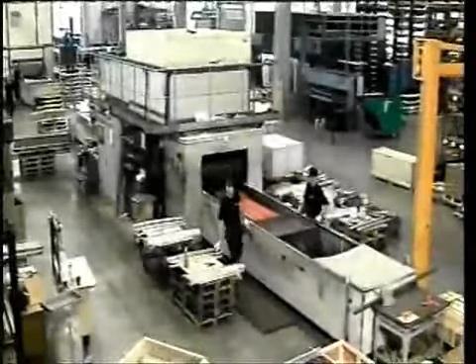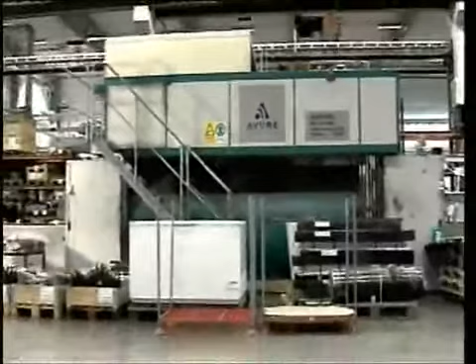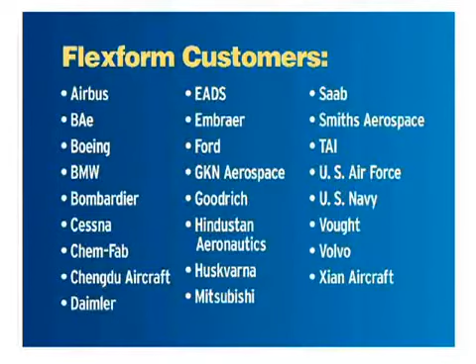Fluid cell pressing, or flex forming, is a low-cost sheet metal forming process designed for both prototyping and lower volume parts production. Avure Technologies is the world's leading supplier of these high-pressure presses, serving major manufacturers around the world. Recent advances in press and tooling design make this high-pressure forming technology more viable and affordable than ever for a growing number of metal fabricating companies.

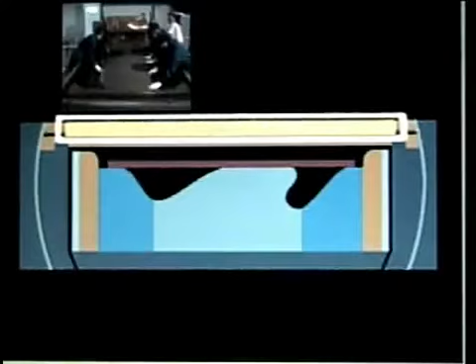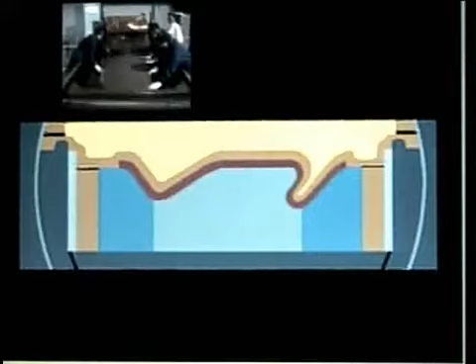Flex forming is a basically simple concept. A sheet metal blank is placed over a single shape-defining tool half. The upper tool half is a flexible rubber diaphragm which is pressurized by pumping in oil. As pressure increases, the diaphragm forms the blank uniformly around and into the tool. When the set pressure is reached, the oil is decompressed and pumped out of the press. The diaphragm returns to its rest position, formed parts are removed, and new blanks are loaded for another cycle.

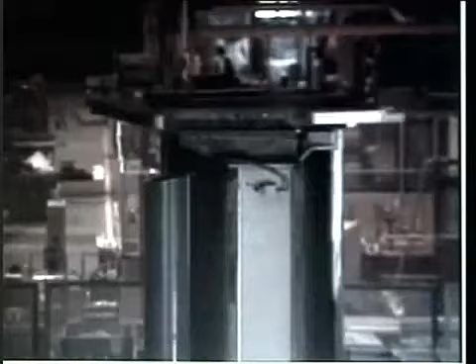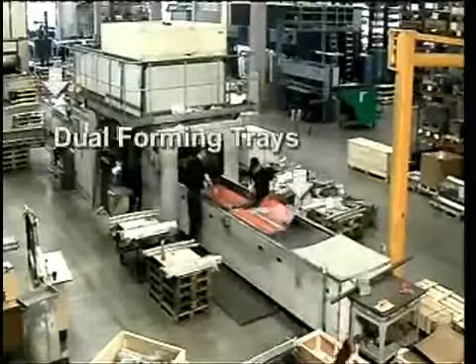Now let's take a closer look at the FlexForm press. The press frame is a horizontally positioned cylinder, reinforced with pre-stressed wire winding to safely contain the high hydrostatic pressure. The hydraulic system is typically housed above the press to conserve floor space. Tools and blanks are loaded into large forming trays on tables that shuttle in and out of the press. Parts are placed in the tray with no need for fine alignment or fixing in place.

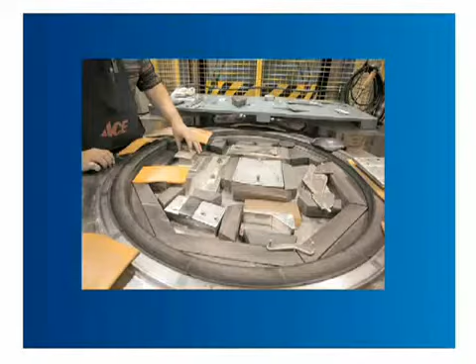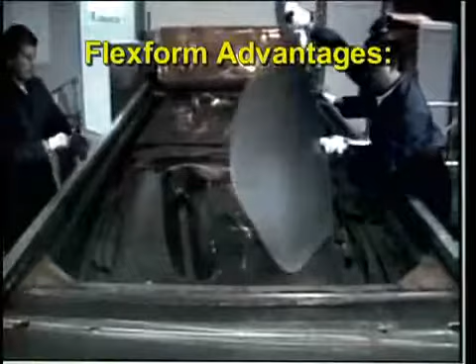Fluid cell forming has proven to have a number of economic and processing advantages, particularly when compared to rubber pad pressing and mechanical or hydraulic stamping. Unlike the 2- or 3-piece tool sets used in stamping presses, Flexform requires only a single shape-defining punch or die, cutting tool costs by 50 to 90%.

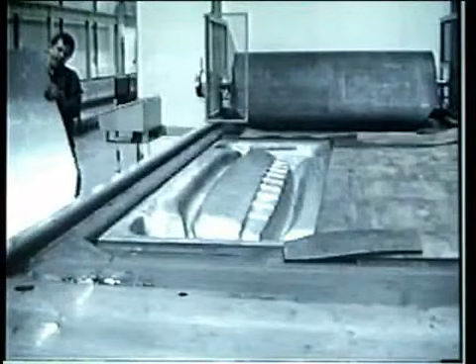Tool matching and alignment procedures are eliminated, and with the uniformly applied pressure, stresses in the tool are almost purely compressional, permitting the use of inexpensive, lower strength, easy-to-machine materials such as hardwood and plastic.

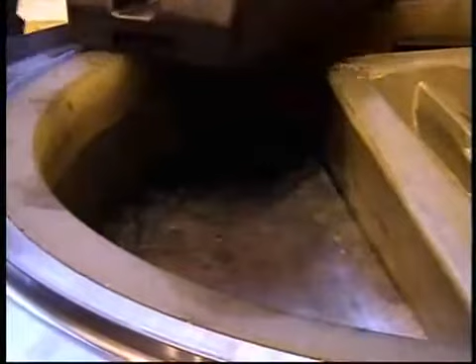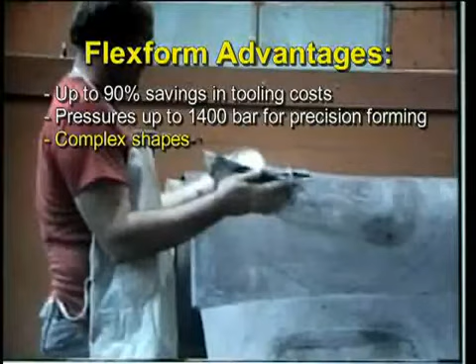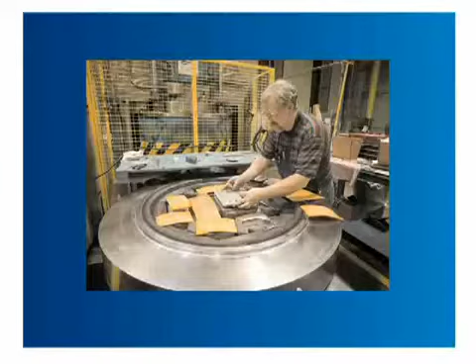Very high pressures up to 1400 bar or 20,000 psi form parts to precise tolerances with little or no manual correction. Intricate shapes, including undercuts and holes, can be produced, often in one operation. Tools can incorporate cutting edges to eliminate downstream trimming. Multiple parts can be processed in a single cycle.

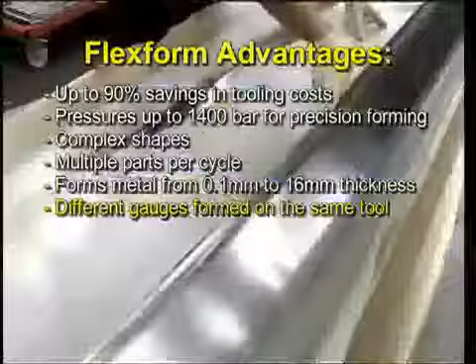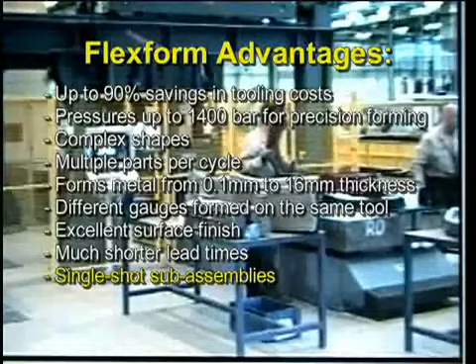Virtually any sheet metal from 1/10 of a millimeter to more than 16 millimeters, 0.004 to 0.63 inches, can be formed. Different gauges can be formed on the same tool. Surface finishes are free from scratches or gall marks. Lead times are dramatically shortened for both prototypes and production parts. Complex parts can be designed and produced that would be prohibitively expensive with conventional presses. Large, intricate parts can be formed, allowing designers to combine smaller components into single seamless units, saving downstream assembly time and the extra weight of welds and fasteners.

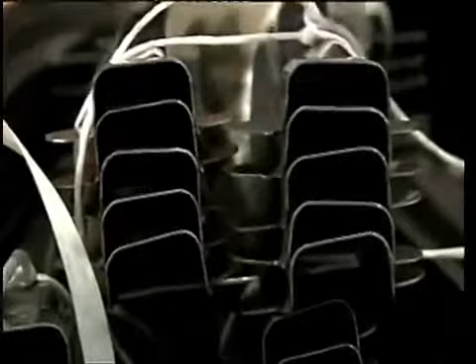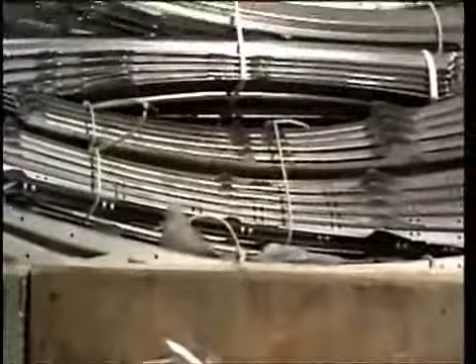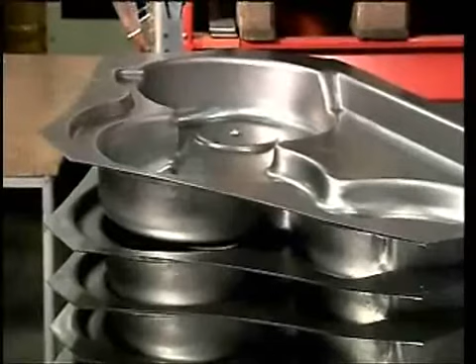Cost efficiency is paramount in the globally competitive aerospace and automotive industries, and Avure has responded with advancements in product design and forming technology. Today, a variety of press sizes and capabilities are available to conform to the specific operational and volume requirements of both OEMs and their contract suppliers. Avure offers FlexForm presses in 3 basic styles.

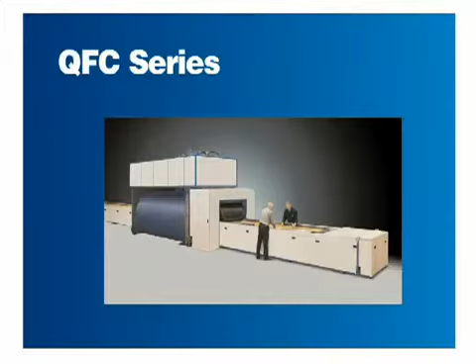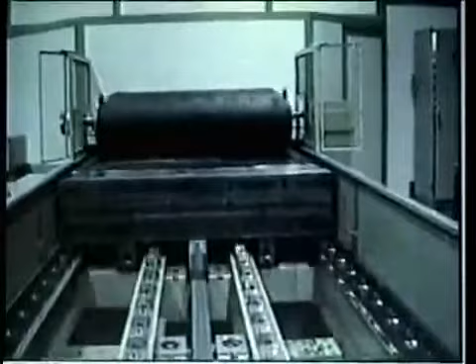QFC presses have the largest forming capacity, with dual rectangular trays up to 8 square meters that can form parts well over 4 meters in length. Standard maximum pressures are 1,000 and 1,400 bar. Recently, an intermediate-sized QFC press has been introduced with a 1 by 2 meter tray and 800 bar maximum pressure.

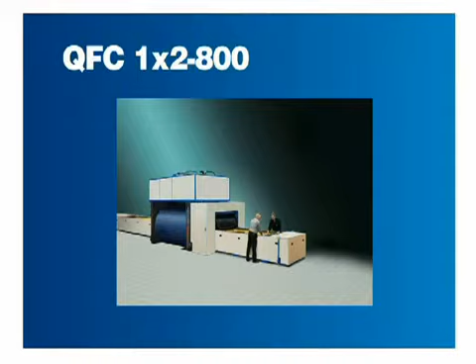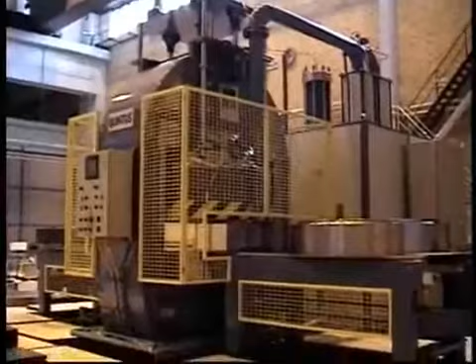QFL presses are compact units with 1 meter diameter circular trays, designed for faster forming of smaller parts. Cycles average about 1 minute, with maximum pressure of 800 bar.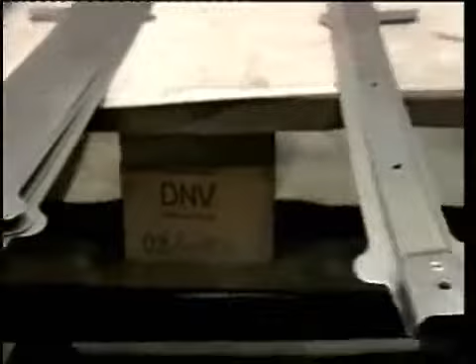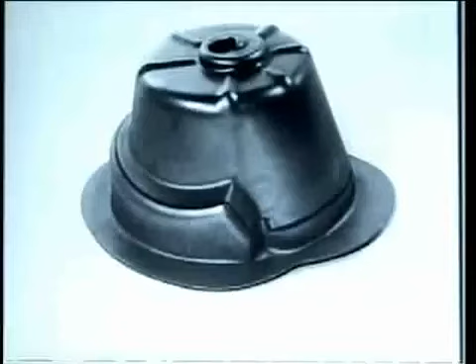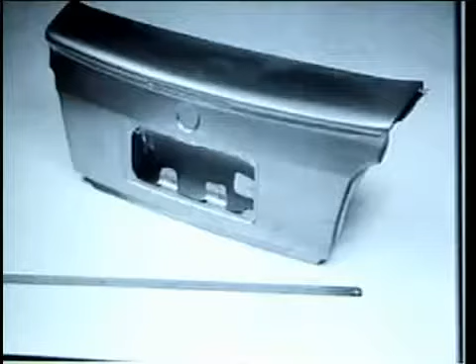Any part configuration that can be manufactured on conventional rigid tools can be produced by Flexform presses. These include single and compound curves, contoured parts with stretch or shrink flanges, shallow recesses, and deep-drawn parts. Designs can incorporate forming features such as internal and external beads, lightening and access holes with or without flanges, and joggles to provide space for adjoining parts.

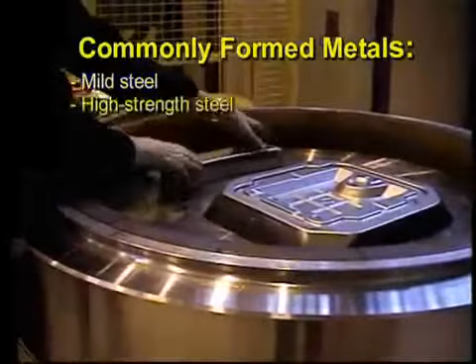The sheet metals most commonly formed on the fluid cell press are mild steel, high-strength steel and aluminum alloys, stainless steel, and titanium. Other materials can include nickel-based alloys such as Hastelloy, Inconel, and Nimonic 75.

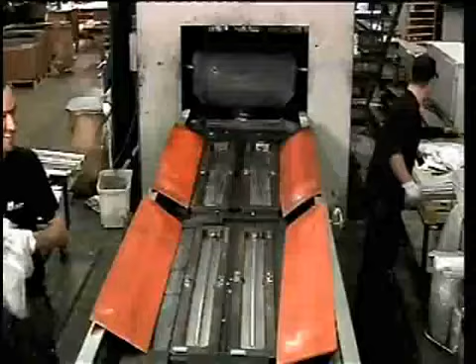Single-piece tooling is the primary reason for the growing adoption of flexforming among sheet metal parts fabricators. There are 4 basic types of fluid cell tools. The punch or male die is the simplest, least expensive, and most widely used type of fluid cell tool, having the same shape as the internal surface of the pressing.

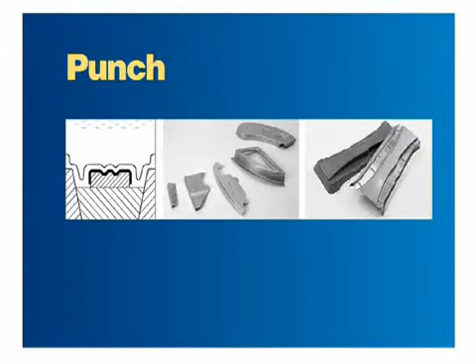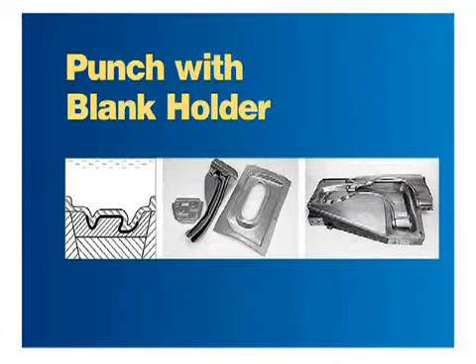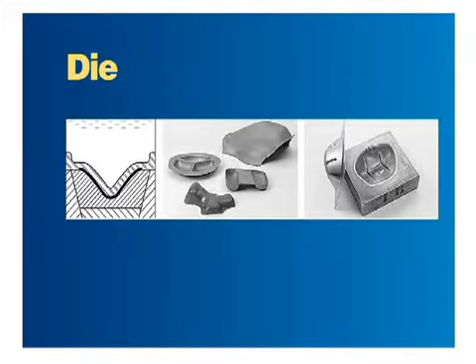The punch can be augmented with a blank holder that supports the entire unstressed area of the blank. This reduces the risk of drawing too much of the sheet metal into the forming area, which may result in wrinkling. The die, or cavity die or female die, consists of a central cavity surrounded by a flat or curved section upon which the blank rests, thus eliminating the need for a separate blank holder. The surface of the die produces the external surface of the pressed part.

An expansion die is used when the blank is to be pressed radially outwards into undercuts in the cavity. The die is made in 2 or more pieces and is pulled apart after the pressing cycle to allow removal of the parts.

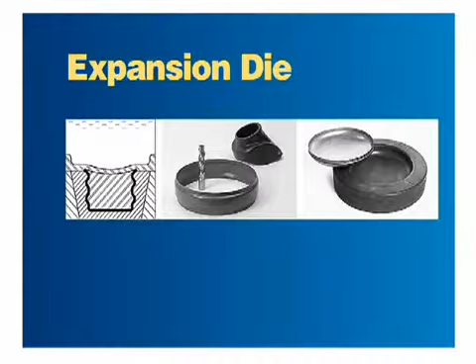Because cycle times range from 1 to 3 minutes, fluid cell pressing has not been considered to be a mass production technique. That being said, many companies use Flexform presses to supply the great majority of their sheet metal parts, taking advantage of unique processing features.

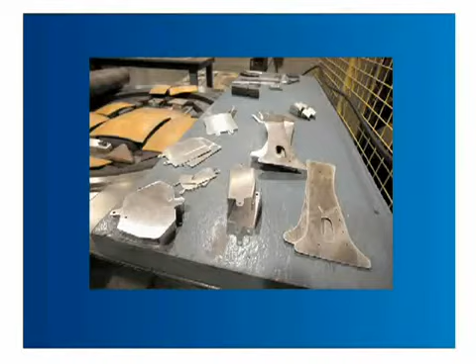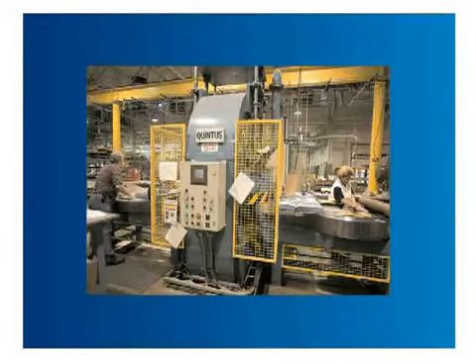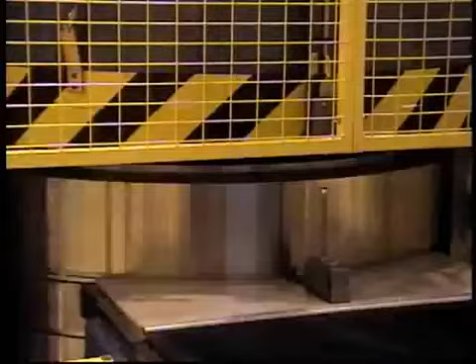Many parts can be formed in a single cycle. The dual tray system results in very short setup times, an important consideration with batch sizes that require frequent tool changes. Current tool designs produce a high percentage of finished, trimmed parts directly off the press, with no downstream rework. Quick cycle presses like the QFL can produce up to 120 finished parts per hour. Automated pallet systems preloaded with tools and blanks are available to cut handling time between cycles.

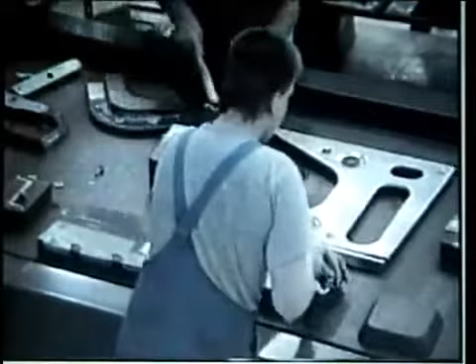Today, nearly 140 Flexform presses are in operation worldwide. Some have been performing successfully for more than 30 years, and a few have achieved or are approaching 1 million cycles.